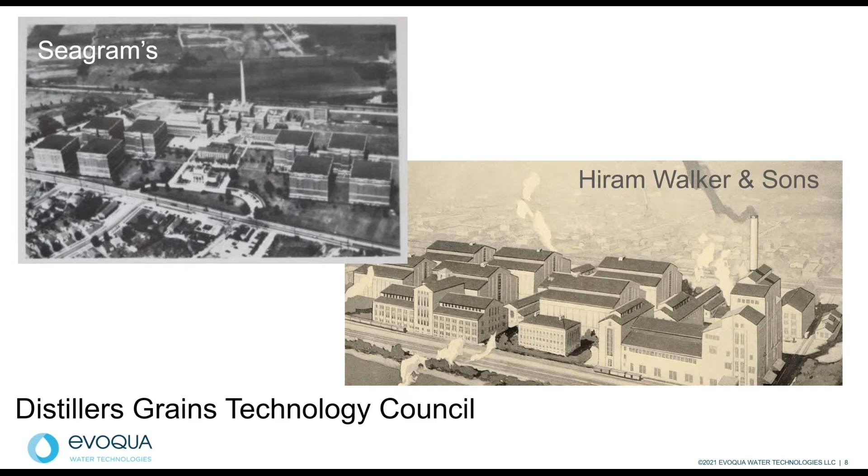Next slide. So really, the reason the council was formed was because the states of Kentucky and Tennessee had started implementing environmental regulations that restricted the disposal of stillage, or spent grains from the fermenters, into local rivers and lakes. So the idea was, what should we do? What could we do with all of these non-fermentable materials? Instead of dumping them into the rivers, animal feed products and use as animal feed ingredients really were the best option at the time.

But even further back, in the 1800s, the beverage industry was using wet spent grains and dry spent grains as animal feeds, and we were actually exporting dried spent grains to Europe for animal feed.

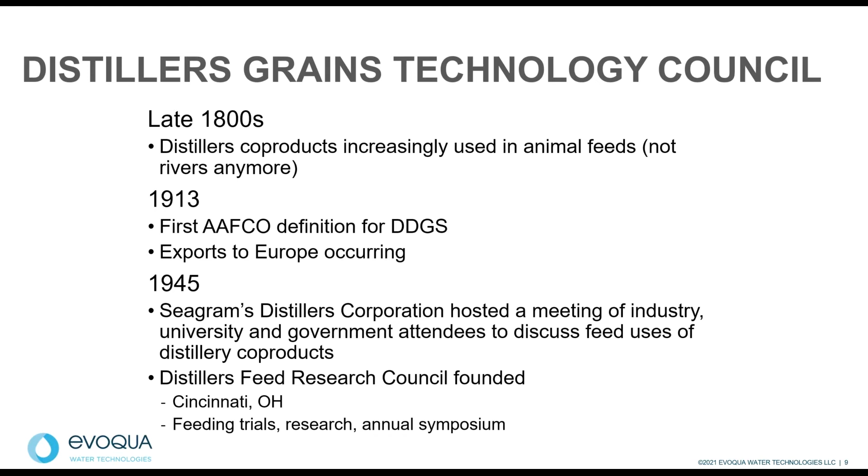Next slide, please. When we think about fermentation and industrial fermentation, whether we're making alcohol for humans, alcohol for cars, or alcohol for other industrial uses, it's not just about the alcohol we're making. We also have to consider all of the non-fermentable components. If we're talking about making any type of alcohol from a cereal grain, whether corn, wheat, barley, rye, triticale, or other cereal grains, there's going to be a lot of protein, fiber, fat, and minerals we have to deal with, in addition to water.

So we'll have to think about the flip side of the coin. It's not just about the alcohol production, and I think this is especially true whether we're talking about small distilleries or large distilleries.

If you build a small distillery that is going to be in the city center, whatever city it is, some of the things you're going to have to think about are not just the electricity and the logistics of getting the grain in and the alcohol out. What are you going to do with all the non-fermentable materials? Sometimes that is a constraining factor for facility construction.

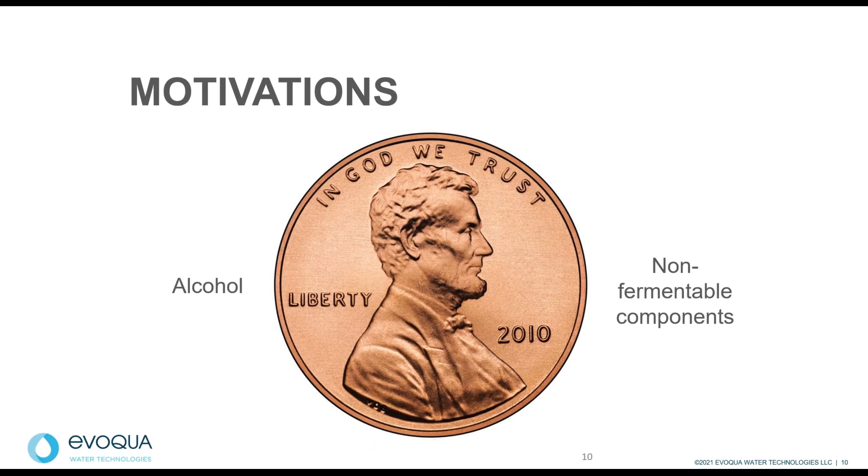If we're talking about using non-fermentables as livestock feed, which many companies have very successfully done, the biofuels industry has really done a fantastic job of this, but this may not be the best fit for you. A lot of companies see this as the easiest way to not just get rid of or deplete the stillage from your facility, but also how to reduce the cost of treatment and how to make money. So it's a balancing act between those manufacturing alcohol, the livestock producers you need to foster relationships with, and also the price and availability.

If you're giving away the stillage or the spent grains, you're really talking about lost profit. And you can further compound that by the fees or fines if you're sending the stillage down the drain for the city municipal system to treat.

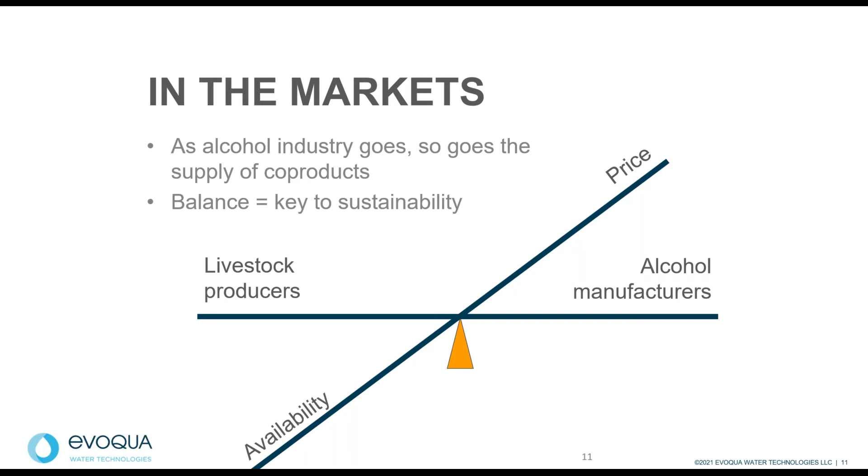When we are doing industrial fermentations and using our non-fermentable components as livestock feed materials, it's easy to think about livestock as a black box, whether it's a fish, a cow, a pig, a chicken, or a horse. What do we control? What do we do at our alcohol production facility that's potentially going to impact what happens on the farm and in that animal?

Everything we do in our fermentation or post-fermentation is going to potentially impact how that animal digests that feed ingredient. And remember, we're working with proteins and fats and fibers and minerals.

It's been shown over the last couple of decades that on average throughout the US and in other countries, if we are doing industrial fermentations and using those non-fermentable components, either as a dry distiller's grains or a wet distiller's grains, on average that DDG is going to replace between 1 and 1.2 tons. So 1 ton of DDGS will replace 1 to 1.2 tons of corn and/or corn soybean meal mixtures. Corn and soybean meal are the two biggest competitors on the national scale for distillers grains.

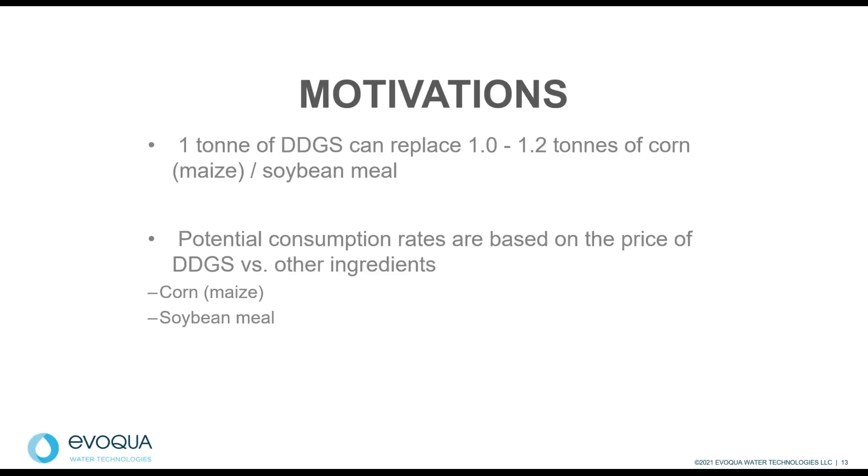So, processes and products. Whether you're making beer, spirits, or biofuels, the theoretical yield we're going to get from alcohol fermentation of cereal grain—this is true for cereal grain, but not true if you're doing a grape fermentation, sugarcane fermentation, or molasses fermentation. But if you're doing a grain-based fermentation, the maximum theoretical yield, if you had 100% efficiency, is approximately a 50-50 split between alcohol and carbon dioxide if we're looking at the glucose utilization coming out of that fermenter.

Remember, we're using cereal grain because it's starch bearing, but what we're really trying to access is the glucose. In reality, we're going to have more than just alcohol and CO2 being made. Part of that is due to yeast cell mass that is produced, and secondary products—the fusel oils, the higher and lower alcohols, not the ethanol we're targeting. Sometimes those components are important, especially for flavor, and sometimes they're not—they just essentially represent a yield loss.

On average, it's been shown that for cereal grains—whether it's corn, wheat, barley, rye, or whatever—that goes into that fermenter, you're going to get about a third of a pound of alcohol, a third of a pound of CO2, and about a third of a pound of non-fermentables, whether in dry or wet form. That rule of thirds is what we typically see.

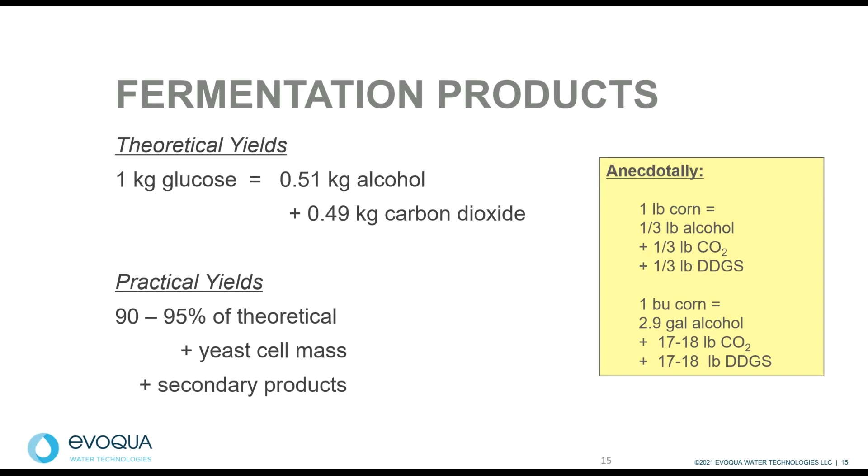When we look at spirits manufacturing, whether you're looking at whiskey, vodka, or other types of spirits, many of the factories are going to be similar in many respects to an ethanol plant, what we typically think of in terms of corn-based ethanol. Not just in the US, but in other countries as well.

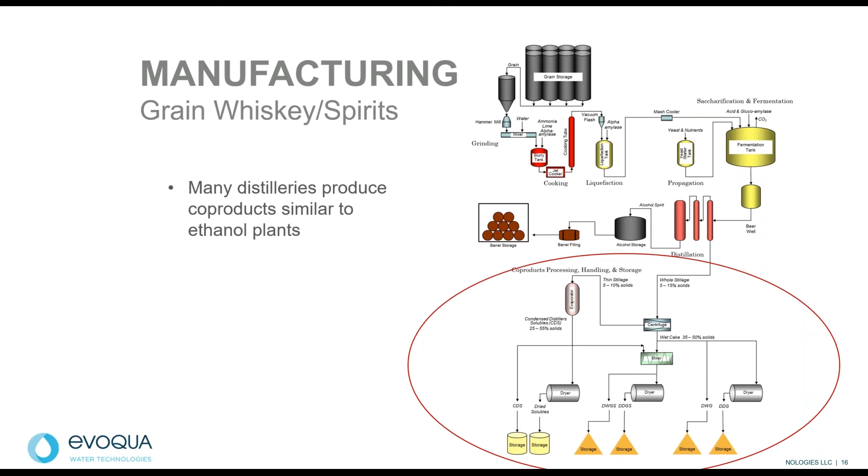Some companies, especially the larger distilleries, will have an evaporator step where they concentrate the thin stillage that comes from the centrifuge to produce a syrup, and then they can add that back to the wet cake to produce distiller's dried grains with solubles, or maybe distillers wet grains with solubles. But there are other things we can do. We see, especially in the larger factories, wet and dry products with or without solubles. They might have wet solubles sold separately or dried solubles sold separately. It really depends on scale. Next slide, please.

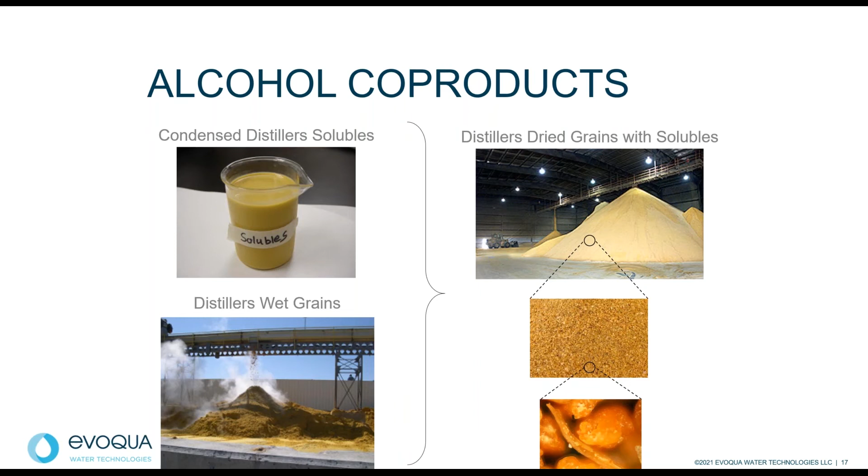If you haven't seen distillers dried grains or distillers wet grains, these are typically what you're going to see, and you also see condensed solubles in the upper left hand of the slide. The color of each of these products will resemble to a large degree the cereal grain coming into your facility. In this case we see a golden yellow, this is a corn-based fermentation. If we have a rye or wheat-based fermentation, we're typically going to see darker solubles, darker wet cake, and darker DDG. So color is largely impacted by the type of cereal grain used in your facility. Next slide.

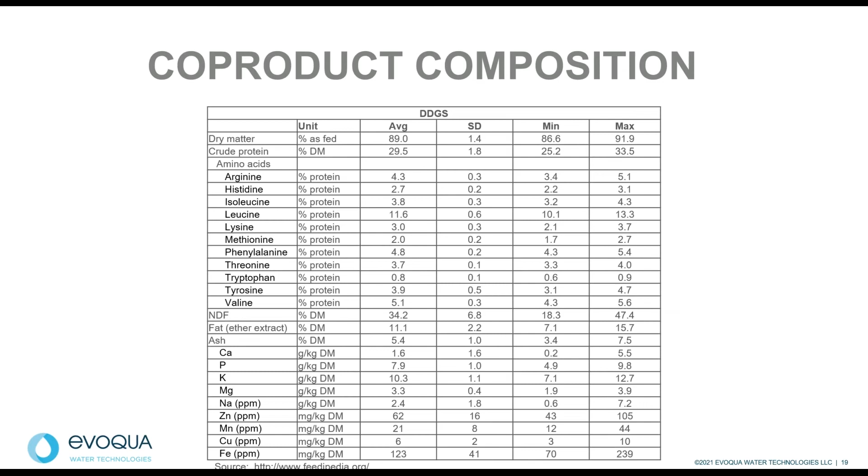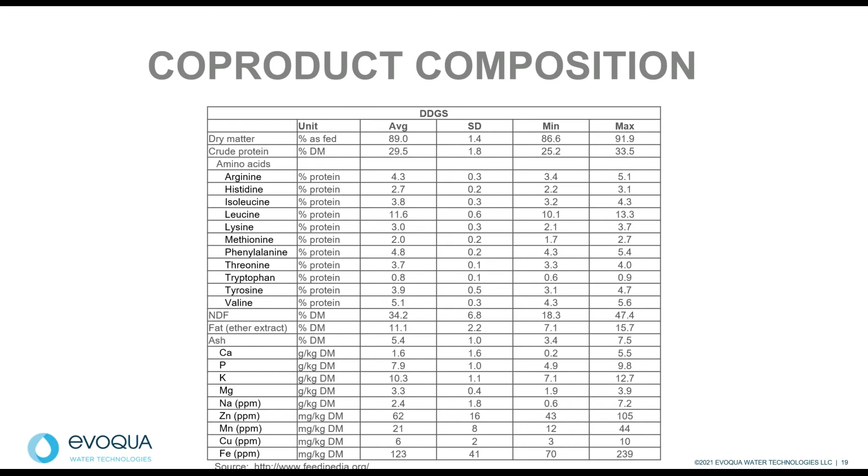If you dry your non-fermentables down into a DDG or DDGS, in this case distillers dried grains with solubles added, protein is going to range from about 25 to about 34-35% for most distillery operations. The ethanol plants are actually producing significantly higher protein, but they've implemented, or are starting to implement, some protein extraction technologies that we typically don't see in beverage distilleries at this point in time. The fat content for distillers grains generally ranges from 7 to about 16%, depending again on the type of cereal grain used for your fermentation. The ethanol plants are by and large removing oil and selling that oil to the biodiesel industry. We see some of the large distilleries starting to do that as well. Next slide, please.

We talk about malt whiskey fermentation, a little bit different process. This really does not resemble an ethanol plant anymore. We see a couple of different types of co-product materials: a centrate, draff solids, and potentially pot ale syrup that is added to the draff to produce distillers dark grains or distillers wet grains. We also see spent lees that might be produced from the secondary still. So the byproducts from this type of manufacturing are going to be a little bit different. We'll go to the next slide.

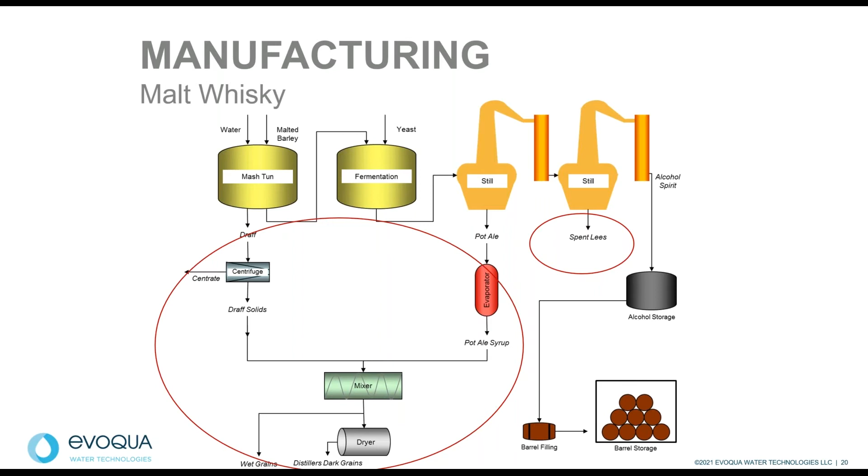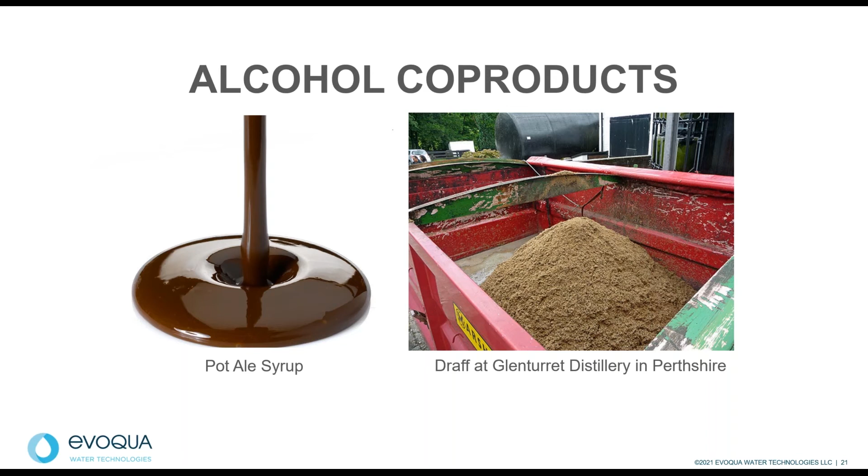Just to show you, here's an example of what pot ale syrup looks like. That's the syrup that is in some respects similar to condensed distiller solubles from a whiskey or vodka plant. And then draff is very similar again to distillers wet grains that you would see at a whiskey or vodka plant. Next slide.

In terms of nutrient content, protein and lipids are two of the critical nutrients we look at for livestock feed applications, but nutritionists really want to understand the full suite of nutrients, including amino acids and fatty acids. If we look at crude protein, pot ale syrup is about 37% crude protein, so it's a little higher in protein than we'd typically see from a whiskey or vodka distillery producing condensed solubles. Draff is about 20% protein, on a dry basis, and distillers dark grains without solubles is about 28%, which is quite similar to distiller's dried grains from a whiskey or vodka plant.

If we look at fat, pot ale syrup is really low in fat content, almost 0%, or if any fat has been extracted, it's quite low. Draff is about 8%, and distillers dark grains are about 8%.

So why are these nutrient values some similar and some different? I think we have to consider that we're talking about a grain-out versus a grain-in style of fermentation. In the grain-out fermentation, we're basically trying to extract the soluble sugars and solubilize them so we can pull those into fermentation. So what we have left in the feed products are much more of the nutrients than we would typically see compared to a grain-in fermentation.

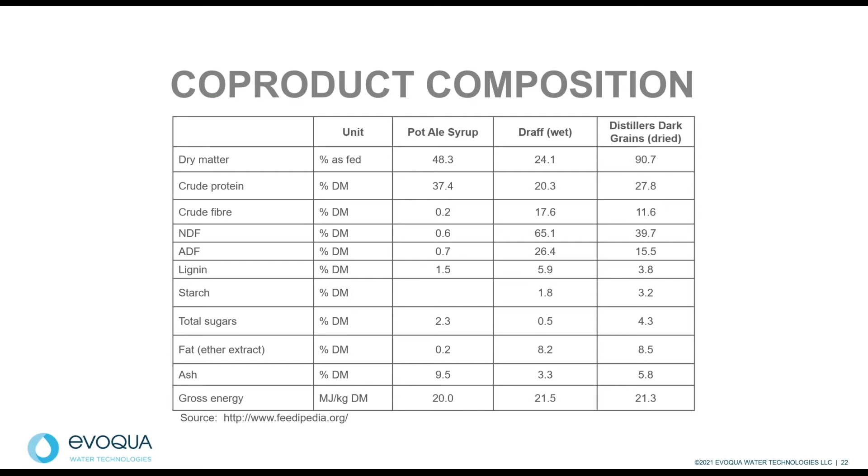Right, next slide, please.

Beer manufacturing also has non-fermentable materials. Again, when we talk about styles of fermentation, much of beer manufacturing uses a grain-out style of fermentation, where we use hot liquor and the mash tun to try to extract the solubilized or solubilizable sugars. In this case, the spent grain or brewer's grain is, in many respects, going to be quite similar to what we'd see from a malt whiskey manufacturing point of view.

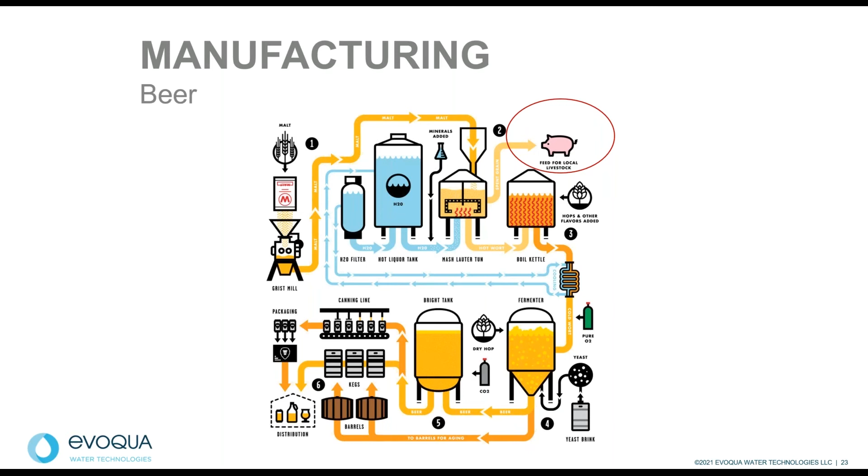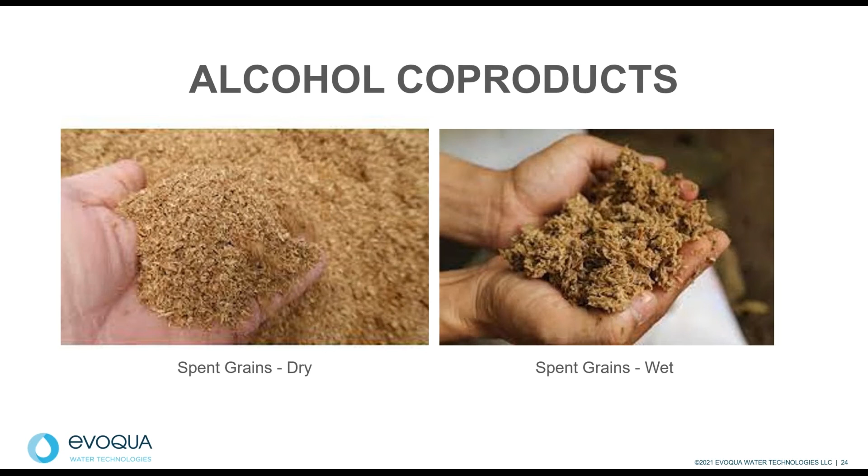We'll go to the next slide and take a look, and you'll see the spent grains, either dry or wet, are in many respects similar to what we'd see as draff from a grain-out style fermentation, a malt whiskey fermentation. Next slide.

Nutrient content wise, protein content for brewer's grains is about 26%, and lipid or the ether extract is about 7%. So just like the draff or the distiller's dark grains we saw from a malt whiskey fermentation system, the biggest difference is really going to be in the mash bill used for that fermentation, and depending on what state or country you're in, what grains you can use.

We do see the dynamics of the beverage industry, whether it's whiskey, vodka, or beer, with lots of novel products hitting the marketplace over the last couple of years. We're not just talking about malted barley anymore; we're also talking about a variety of different kinds of cereal grains being used for these industrial fermentations. So we see the nutrient contents varying when we look at these co-product feed materials.

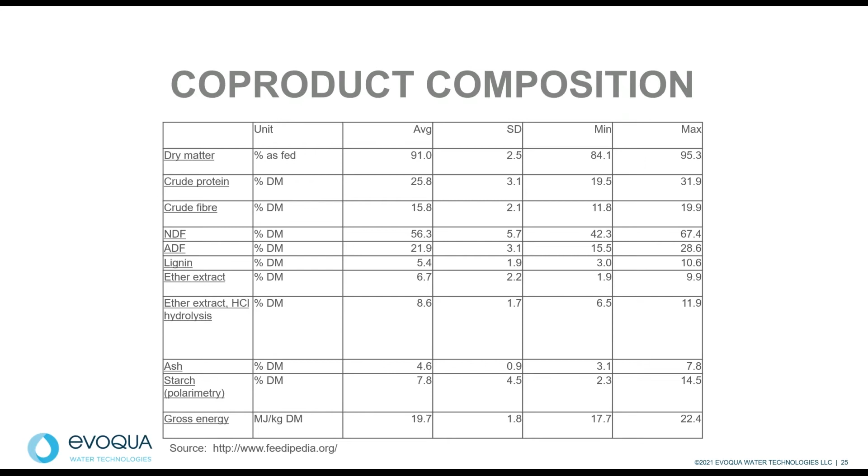Now, I do want to mention, if you're going to be using your co-product feeds or byproduct feed materials in the livestock industry, we as an organization, the DGTC, have developed over the last couple of years some guidance tools that you might be interested in using, talking about the different kinds of feed materials we see coming from these industrial styles of fermentation.

Specifically, we're looking at distilleries and biorefineries. What we used to call ethanol plants, we're starting to call biorefineries, because we see these companies starting to extract proteins and lipids and do some fiber fermentation. So we really see biorefineries evolving in terms of the feed products they're manufacturing, and they're targeting specific species, especially with high protein or high fiber style feeds.

But if you're not moving in that direction and you're building a distillery or a brewery, and you're going to be selling these into the livestock feed marketplace, what are we making? So we've got some guidance documents that will hopefully be helpful for you. Next slide, please.

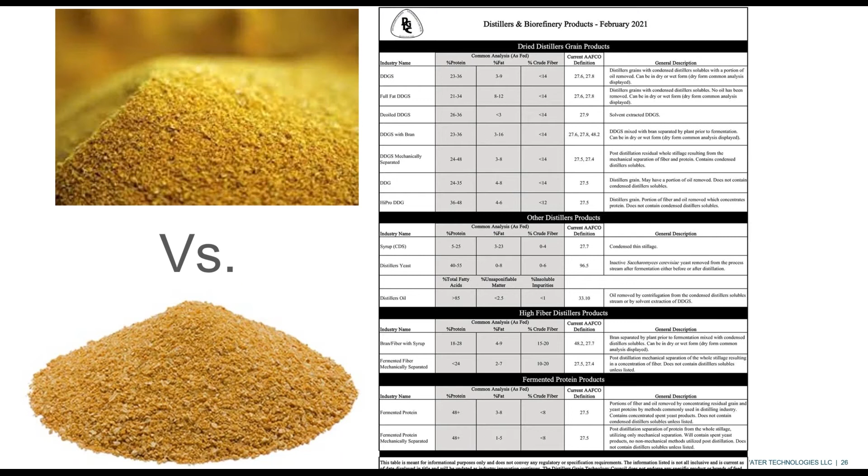So let's talk about some economics. What I mentioned, corn and soybean meal being the biggest competitors for our feed materials that we're going to be producing, whether it's brewers grains or distillers grains or draff, whether it's beverage or biofuel. We're competing with corn and soybean meal in the marketplace. And so it's important to understand the marketplace evolves quickly, and sometimes this is due to situations like COVID. Sometimes it's due to tariffs and trade wars with other countries like China, for example. Sometimes the feed values are dictated by supply and demand in the US itself.

So if you're going to be selling your feed material into the livestock industry, it's important to understand what is the value of this material, what's it worth to me as a company. And if you're giving it away, you're really not capturing that value. Next slide, please.

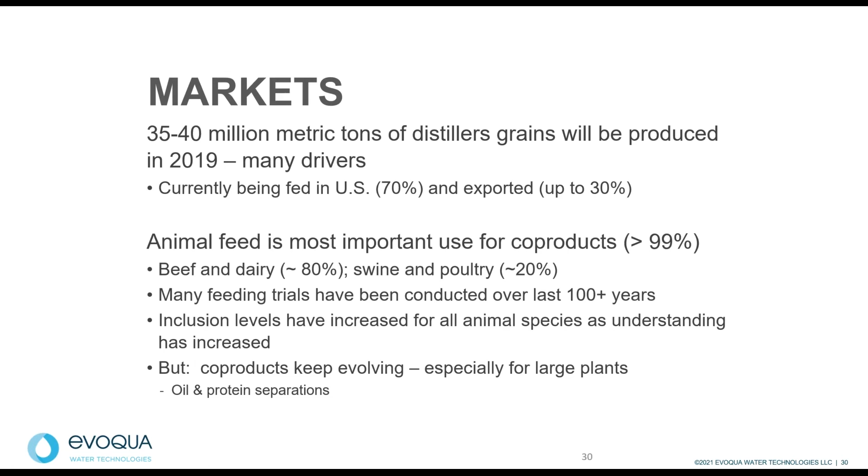So most of the domestic use of distillers grains and brewers grains goes to beef and dairy, but there is a growing percentage that's also going into the swine and the poultry industry. And I think these are going to shift a little bit as we move forward over the next 10 years, as we see the ethanol plants start to evolve in terms of their protein products and their fiber products and their fat products. Next slide, please.

So if you want to deal with your stillage coming out of your fermenters, how are you going to do that? Are you going to send it down the drain, or are you going to try to capture the value that's there and not lose that opportunity cost? So some distilleries just provide their slop to local farmers and either they give it away or they sell it for 50 cents a ton or 10 cents a ton. It's expensive to ship water, whether you're shipping it or the farmer is shipping it.

And it's expensive to send your stillage down the drain and have the local municipality do the water treatment. So maybe an option that some companies are thinking about is separating solids from liquids, and that's going to reduce the cost for transport as well as potential water treatment. Next slide.

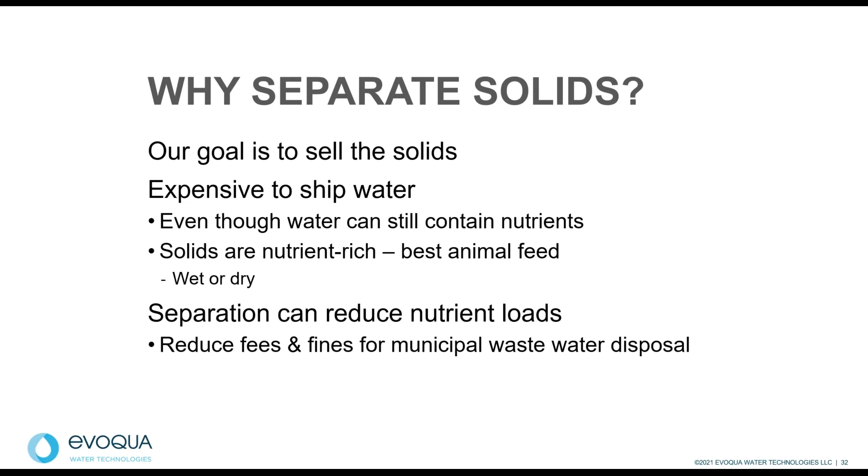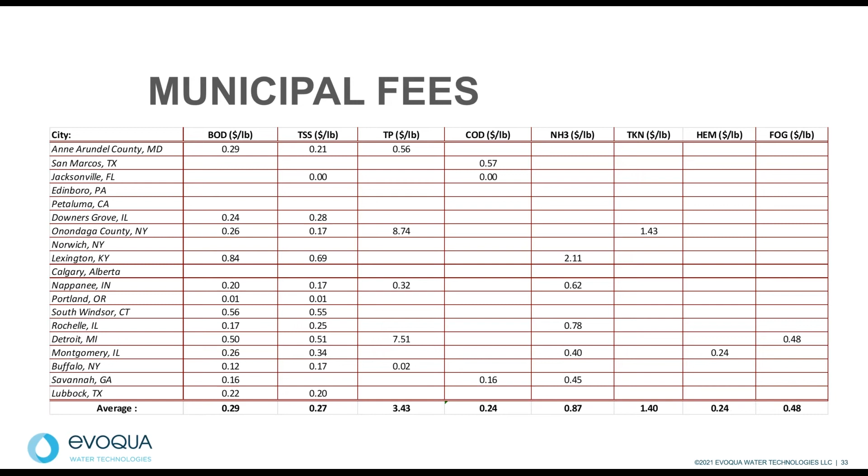So every city is going to be different. Every municipality is going to be different in terms of how to calculate what those fees or surcharges are going to be. You'll see that most cities use BOD as part of their calculation, but most cities don't use COD. Some do, but most don't. And it really depends where you're located to really understand what is that cost going to be to me as an organization, as a company, if I send this down the drain and have the city deal with this. Next slide, please.

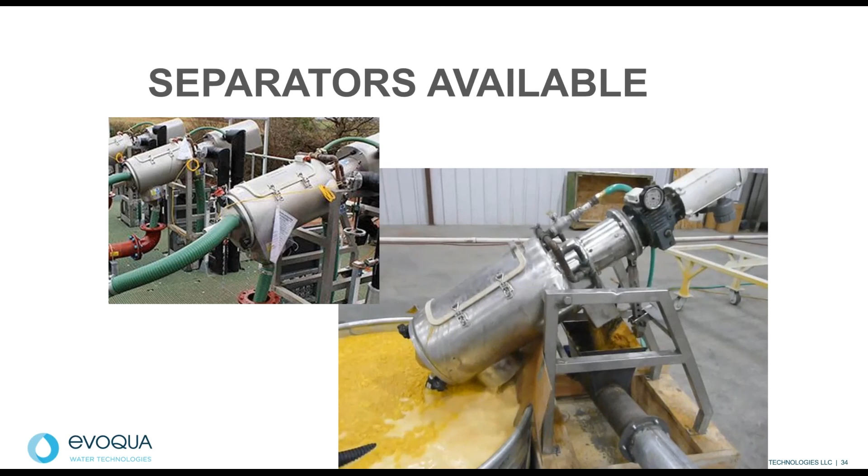So there are lots of different separators that are available. Some are quite expensive and some are low cost. This is an example of a small centrifugal style of separator that separates liquids from solids. Next slide.

How much do you need in order to break even? That's what I get asked quite a lot. If we're going to try to produce a product that we're going to ship to local farmers that's about 50% water, 50% solids, which is typical for a distiller's wet grain.

If you talk about a really small scale centrifugal separator, it's about $35,000. If you're thinking about a large scale separator, that's going to be more like $100,000. So really, how many tons do you have to produce in order to break even? Sales price for distillers wet grain generally bounces around between $50 and $100 per metric ton. So somewhere between 350 and 700 tons you're going to have to produce. So depending on the scale of your factory, you can determine how long it will take to produce that.

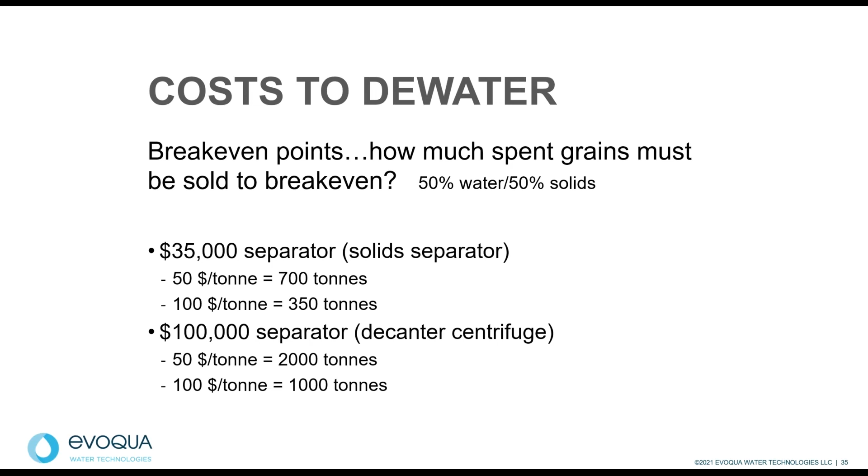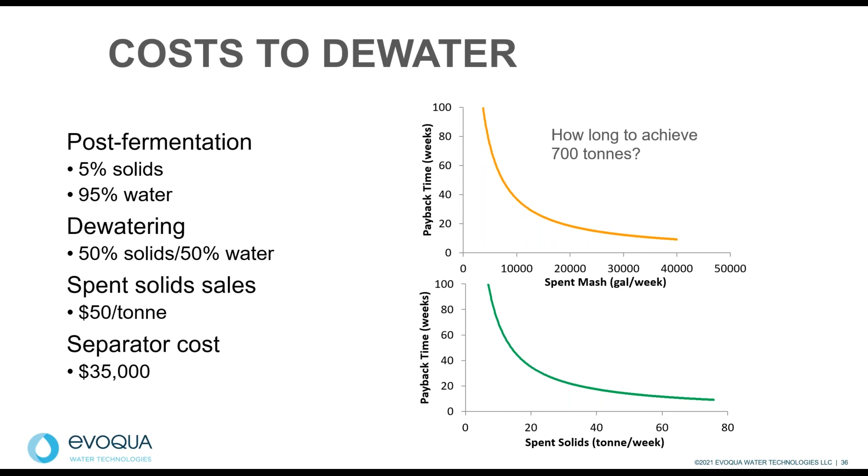So these seem to be really a good avenue if you're trying to sell a distillers wet grain product into the market. You're still going to have to deal with the centrate or the thin stillage, which is primarily water and then the dissolved solids. And most companies that install these separators will sell their separated solids as distillers wet grains for livestock feed, and then they'll send the centrate down the drain to the city. And what we have seen is more than a 50% cost reduction for disposing of the stillage by using that approach. Next slide, please.

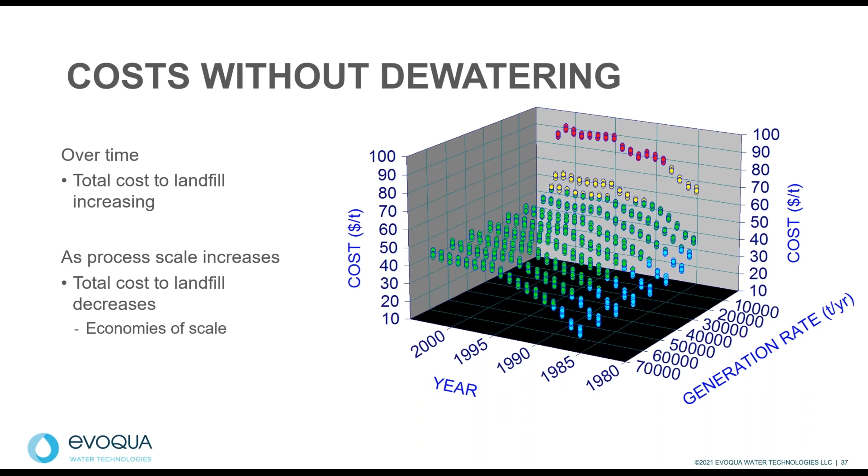Some companies do landfilling of their stillage, which again, it's expensive to ship water, but also tipping fees nationally are on the increase. So if we take a look at some of the trends, the bigger you are, the less expensive it's going to be. And as we proceed in time, the more expensive it's going to be to landfill that stillage. So it seems to make sense to try to add value and not just landfill and not just send it down the drain to the city. Next slide, please. Well, next slide as well.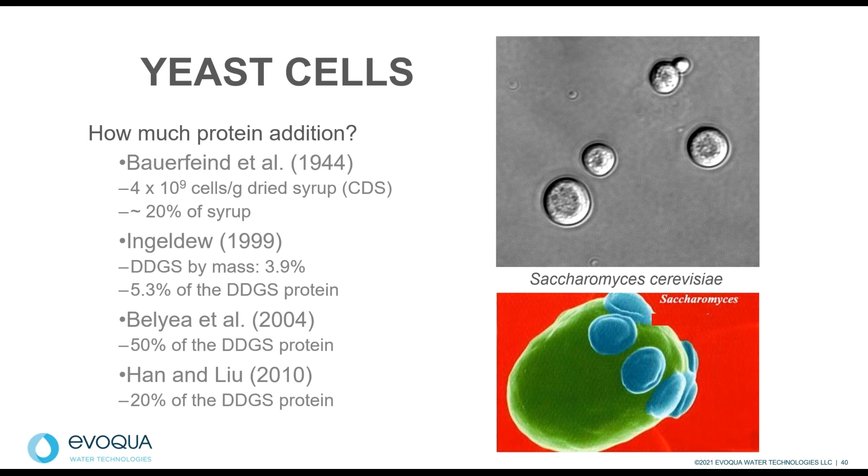A couple of other issues I wanted to talk about. Beverage and biofuel fermentation use Saccharomyces cerevisiae, the standard brewer's yeast, and just in the last couple of years, we have seen livestock nutritionists really start to understand there is value in the yeast as part of the livestock feed ingredient components. So if we're sending this down the drain, we're really losing this value. Yeast acts as a prebiotic and a probiotic, and we're just now starting to understand that there's a lot of value in taking this yeast and sending it to livestock as a feed ingredient. Next slide, please.

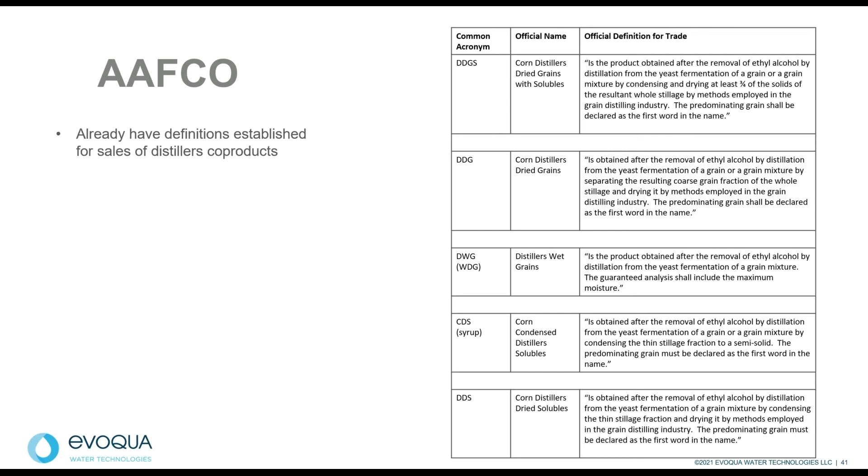If you do that, again, earlier in the presentation, I mentioned definitions. So the DGTC has developed a set of types of co-product feeds, and that is all revolving around AAFCO, or the Association of American Feed Control Officials. You cannot legally sell a feed ingredient in the US without a legal definition as published in the AAFCO official publication. And luckily for almost all of the breweries and distilleries in the market right now, there are definitions that your product can fit under. So this makes your life easier. Next slide, please.

If you do sell your stillage or spent grains as an animal feed ingredient, it's great that we've got AAFCO definitions ready for you all to use, but you will have to comply with the FDA's Food Safety Modernization Act. So you are producing a livestock food, and you'll have to follow the federal regulations in terms of facility sanitation and cleanliness, and then hazard control, so that we're not poisoning animals or potentially causing problems with those animals. Next slide, please.

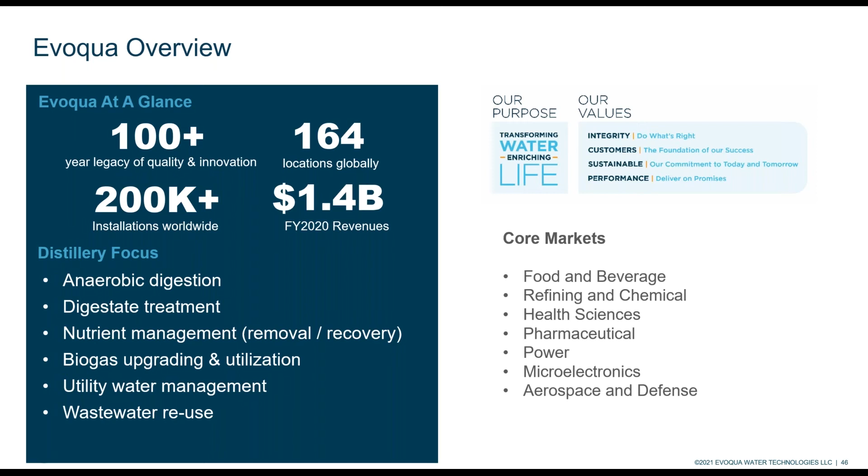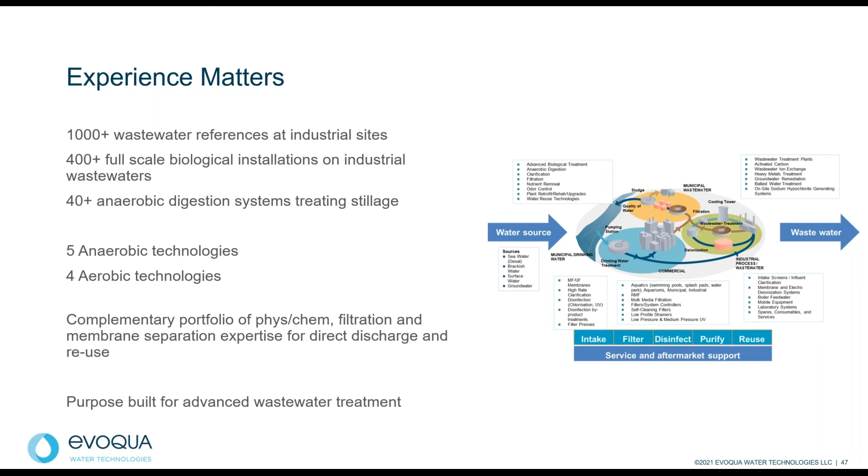We're highly experienced in the business, been doing anaerobic digestion systems as Evoqua for over 100 years. We have 1,000 wastewater reference installs, 400 on industrial wastewaters, 40 anaerobic digestion reference installs on stillage, 5 anaerobic processes and 4 aerobic processes to pull from, and the full complement of physical, chemical, filtration, and membrane separation technologies that you need to facilitate either direct discharge or wastewater reuse.

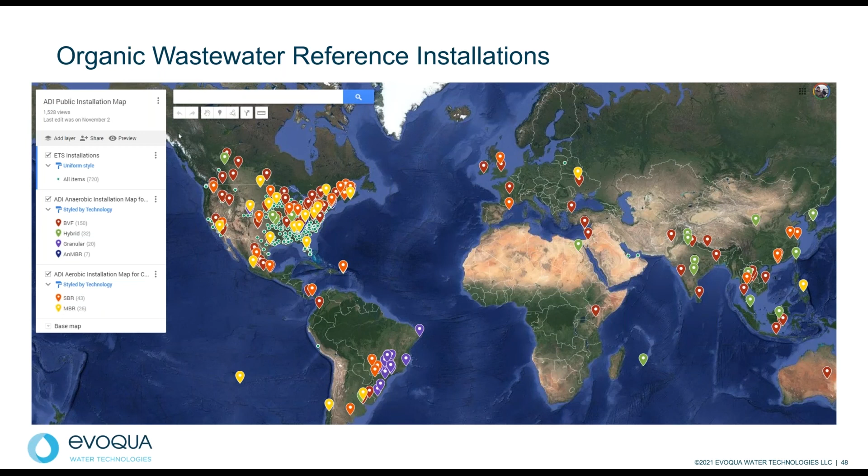Here's a quick look at the global reference installation map. You will see that red, green, purple, and blue are anaerobic installations. Orange and yellow are aerobic polishing installations. And the little green dots are dissolved air flotation. Here's another look at the distillery specific reference installations and process used.

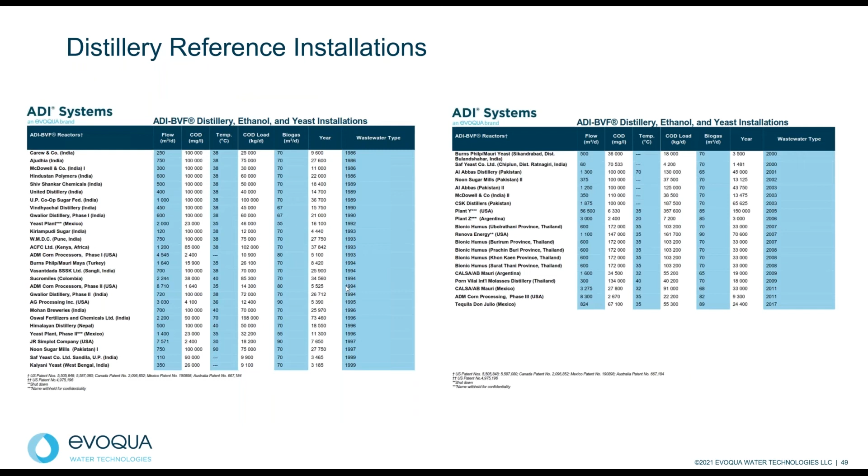I would be remiss if I didn't mention commitment to sustainability. Evoqua is aligned with the United Nations Sustainable Development Goals. We, of course, primarily contribute to clean water and sanitation, although we also play a role in affordable and clean energy, responsible consumption and production. We measure and manage our sustainability commitments through both our handprint, which is how we help you guys, our customers, accomplish your own goals, and our footprint, which is how sustainable we are in our own operations.

Evoqua is a service organization. As you contemplate the many permutations and combinations of dry distillers grains and/or anaerobic digestion, it is often helpful to know that service and support is available. Evoqua is the largest service network in North America. We service, support, operate, and maintain everything that we sell and many things we don't.

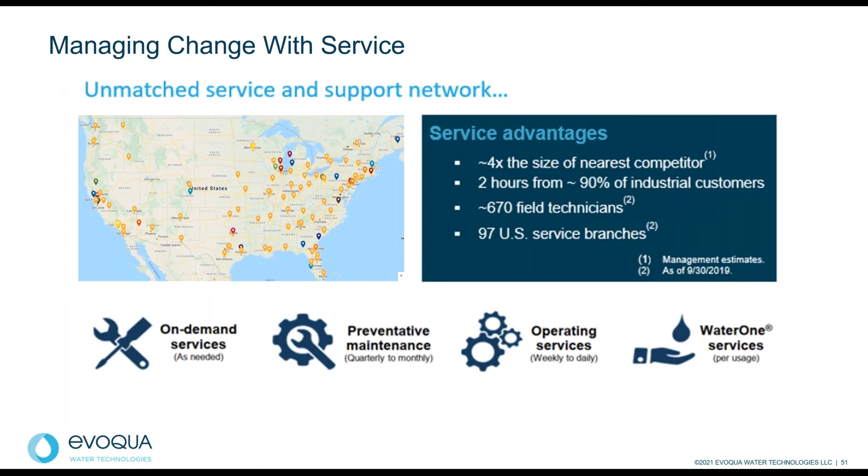As with any high-strength organic feedstock or waste material, however you want to view it, it's often helpful to have analytic and lab and piloting and bench scale capabilities available to you. We do, of course, have those. Stillage is a complex material, and it is often helpful to start at the lab to validate assumptions, methane potential, toxicity testing, and so on as you develop your project.

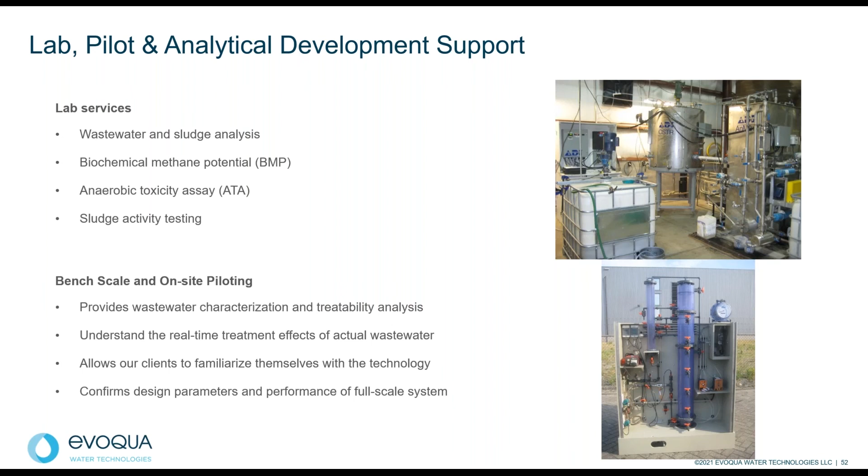I'd also like to mention that we've recently launched a Sustainability and Innovation Hub in Pittsburgh just earlier this year. This facility will be used for stillage digestion research and development, among other things. This is a state-of-the-art facility intended to be not only a technical hub, but a commercial hub where we can co-develop projects with interested parties.

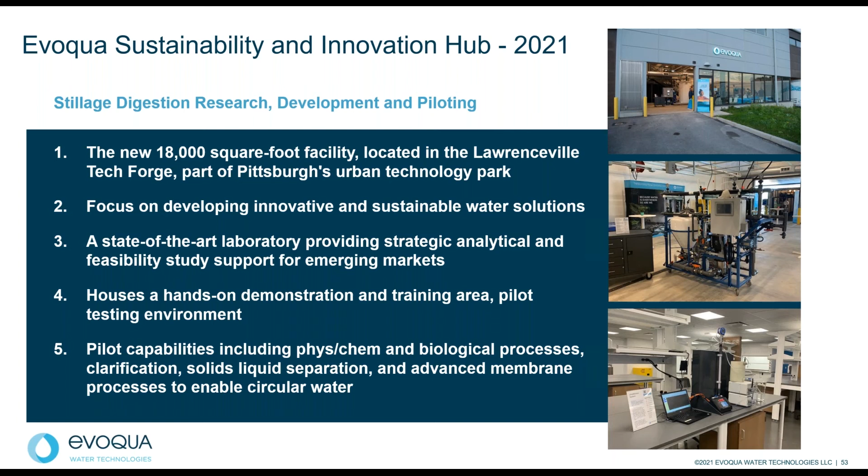The economics of DDG, as Kurt mentioned, aren't simple. There's a lot of factors involved there as well. And there's perhaps a thought that it is more suitable for the larger processors to absorb that type of infrastructure and investment to play in that market.

When we look at the economy overall, especially the fuel economy, we're of course seeing strong support and incentives around renewable fuels. So that is increasing the value of biogas and decreasing the cost of converting stillage to biogas. That, of course, aligns well with corporate sustainability goals as we all endeavor to reduce our greenhouse gas emissions and carbon footprint.

And if you think of DDG and the energy inputs required, it's inherently an energy intensive process, which can also further enhance the attractiveness of a low operating cost alternative or a net energy positive alternative of anaerobic digestion. Of course, as Kurt mentioned, brewers grains are similar to DDG, and the distillery industry can simply look at the brewery industry as an adjacent market that successfully adopted anaerobic digestion as a primary treatment process.

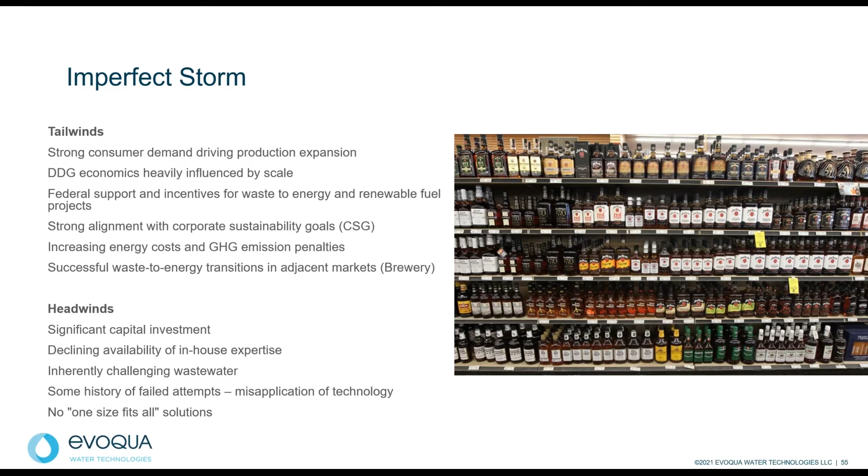Thank you, Barry. Again, to put it into context, this is just an introduction. We're discussing topics around the idea that with this co-product from alcohol production, instead of getting value out of it by drying it and selling it as animal feed, an option that might be put in front of you from Evoqua would be to take that same material and digest it anaerobically instead, turning that food value still present in the stillage into a form of green energy rather than drying it up and selling it as animal feed.

So we'll talk very quickly about some of the issues around anaerobic digestion. As you take the energy out in the form of biogas, there might still be other things you need to deal with, such as nutrient removal, nitrogen and phosphorus. What do you do with the biogas you're generating? How do you get the most value out of it? There are also some waste products out of anaerobic digestion that we will discuss, and what we do with those waste sludges, and can we really get value out of it in the form of fertilizer as well.

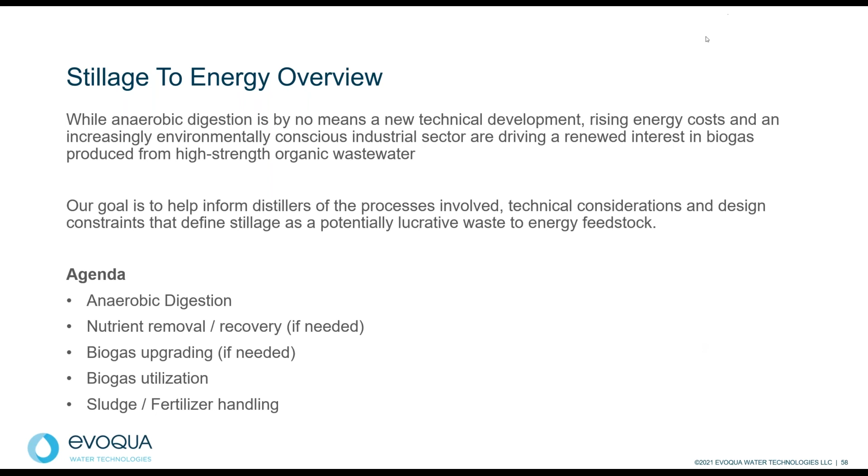Next, Barry, thank you. So stillage, as Kurt was describing, you have, after you've taken the glucose and sugary material in that feedstock and converted it into alcohol, there's yeast that does that in the absence of oxygen. Yeast takes the glucose into alcohol.

Yeast takes the glucose into alcohol. There is still all that other organic material that is food, but it does not go through that biochemical pathway toward alcohol. There's still protein and fat, oil, and grease that remain in the stillage—very strong material. You're making that soup, that broth, in order to ferment the sugars. What's left over after distillation has a lot of organic content, a lot of nitrogen, a lot of phosphorus. Depending on your feedstock—corn, rye, or sugarcane molasses—that will also affect the amount of non-degradable or slowly degradable material, the amount of ash still present in that waste material.

We will take that into consideration as we look at the overall picture of your stillage and look at the right way to get value out of it, other than just disposing of it in a landfill, like Kurt was saying.

So here, what we're doing is, in a way, the same concept. Instead of feeding cattle or livestock, we're feeding anaerobic microorganisms that will turn the protein left over in the stillage into energy.

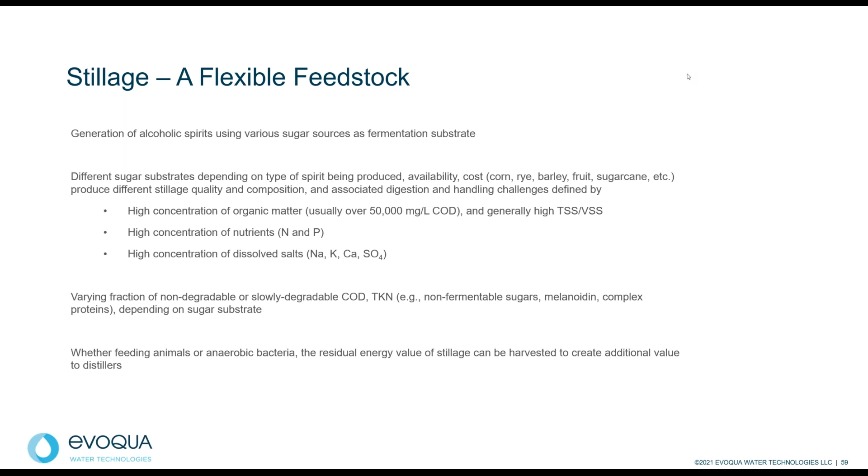Okay, so just very basic fundamentals on anaerobic treatment. You can think of an anaerobic reactor in a way similar to making alcohol, where instead of yeast turning glucose into ethanol, we have a whole consortium of anaerobic bacteria, anaerobic microorganisms, that again in the absence of oxygen will transform the organics into biogas—into methane mostly, and also some CO2.

There will be some remaining organic material—organics not fully degradable anaerobically might still be left over in the digested liquid. Also, some of the energy in the stillage is converted into new biomass. So out of 100 pounds of COD that come in, you will have about 5 pounds of digested new bacteria that you will remove from the system as sludge.

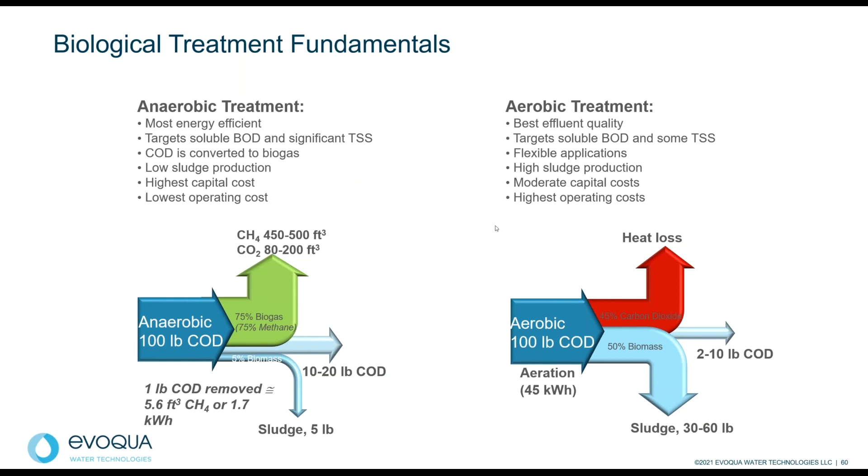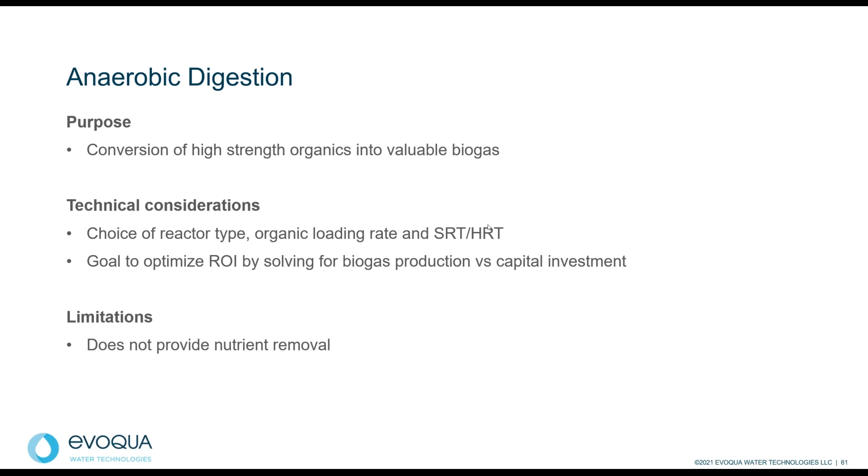Okay, so again, the idea is to apply the right technology to every particular situation. We'll look at the technical side, we'll look at the economics, and the solution will be the right combination of technical and economic factors.

What you do after anaerobic digestion will affect whether you need to do some post-treatment on that digested effluent. As we said earlier, one advantage of talking to Evoqua is the fact that we have at our disposal a whole series of anaerobic digesters. So it will be a case of us using the most appropriate technology for the particular needs of each plant, and we'll look at the local conditions, treatment objectives, economics, of course.

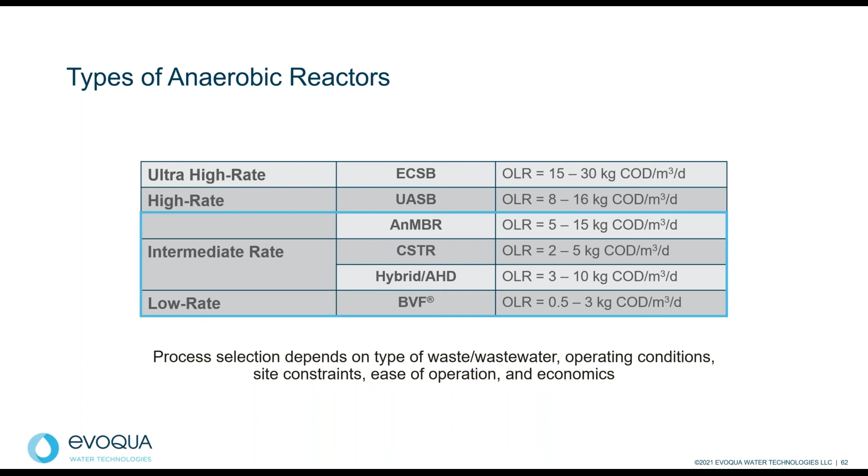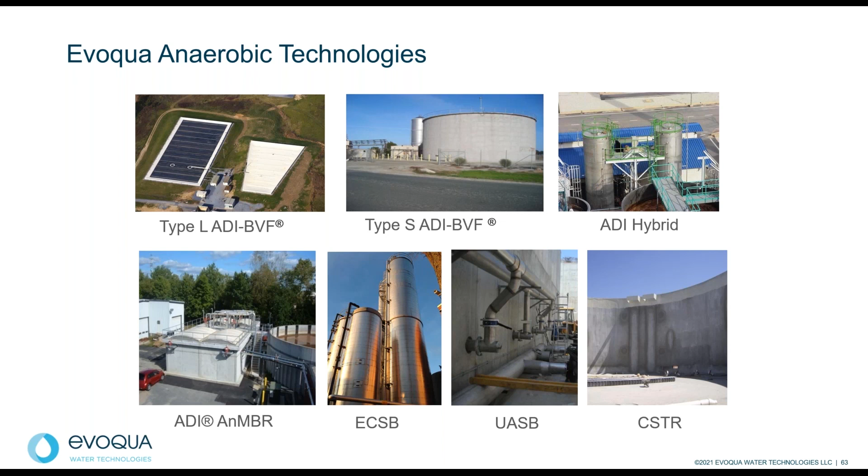This is just to give you an idea of what those reactors may look like. I will concentrate on the reactor on the top left, so that's the low rate ADI-BVF reactor. The reactor on the bottom left would be the anaerobic MBR system. And what we are using also for stillage digestion will be a form of a CSTR, so on the bottom right. I'll go quickly through those as examples of what you can do with stillage.

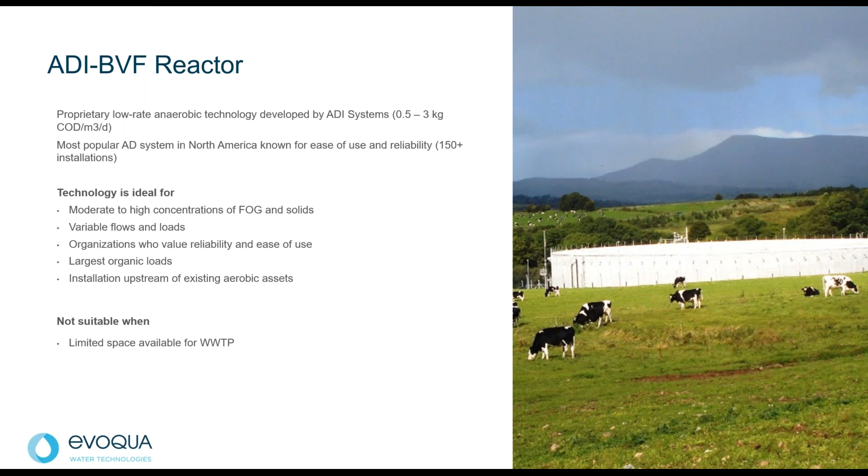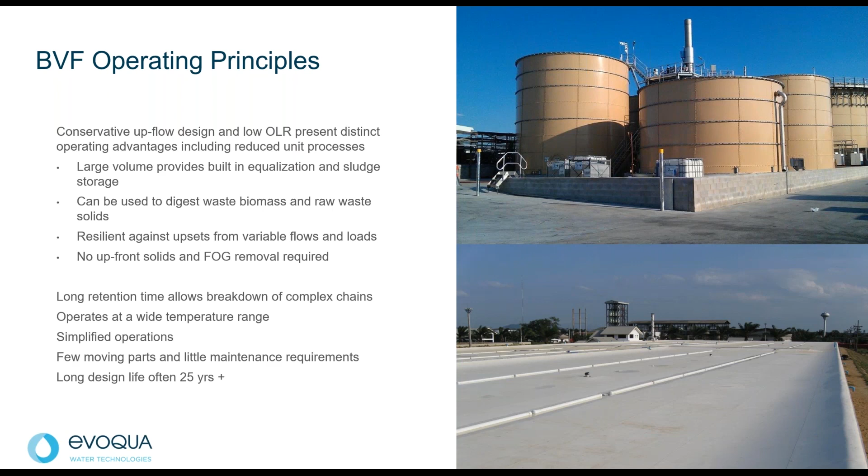The BVF reactor has been used at over 40 distillery plants around the world. A lot of them are sugarcane molasses-based distilleries, but also this system has been used at distilleries in North America for the treatment of ethanol or alcohol being made from corn or similar cereal grains. The BVF reactor is characterized by the long retention time, so it's a large reactor for the amount of load that you're treating. But again, that large volume gives you the stability required, the time required for digesting not just the complex proteins that are in the stillage, but also the organic, volatile, digestible solids that are still in there as well. So this type of reactor is very good because it can digest the stillage straight up without any pre-treatment, without any removal of the solids or the fat, oil, and grease.

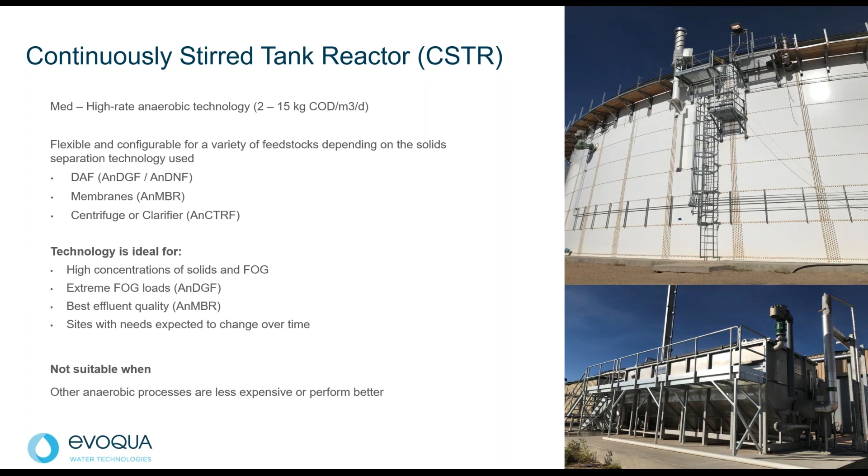The same applies to a CSTR type of approach, as I was saying, that would be the medium rate reactor. The main difference between the CSTR and the BVF reactor is the fact that after you come out of the anaerobic digester, you will need a unit operation to separate the solids from the treated stillage. So in this case, we will look at each specific situation to decide on the type of separation, whether it's flotation, whether it's membranes as a physical barrier to remove those solids, or perhaps a centrifuge or some other form of physical separation of the biomass, keep the biomass in the anaerobic environment, and then discharge a liquid stream with a very low concentration of suspended solids. Again, this is still ideal for treating stillage straight up without any pre-treatment.

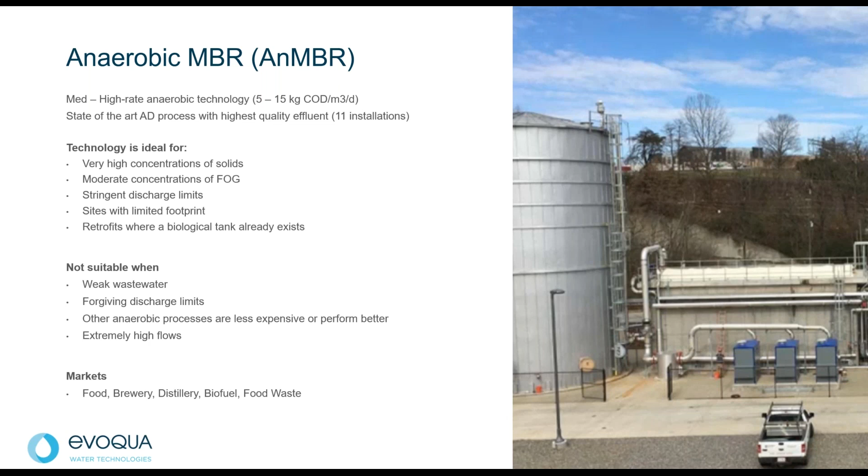Finally, a more recent development in anaerobic digester technology is the coupling of the CSTR, the continuously stirred tank reactor that you see on the left, and a membrane separation unit process, that's what you see on the right, where we were taking ultrafiltration and microfiltration membranes to keep the biomass inside of the system, and then discharging just a clear effluent with no suspended solids. Again, very well suited to very high COD, very high suspended solids concentrations that you'll see in stillage.

As I said before, the anaerobic digester will take the proteins and organics and convert those into methane. It will not do much to nitrogen and phosphorus. So the high concentrations of nitrogen and phosphorus that you'll see in stillage, you will still need to deal with, or pay your downstream POTW, your sewer, your municipal treatment plant, to treat it for you.

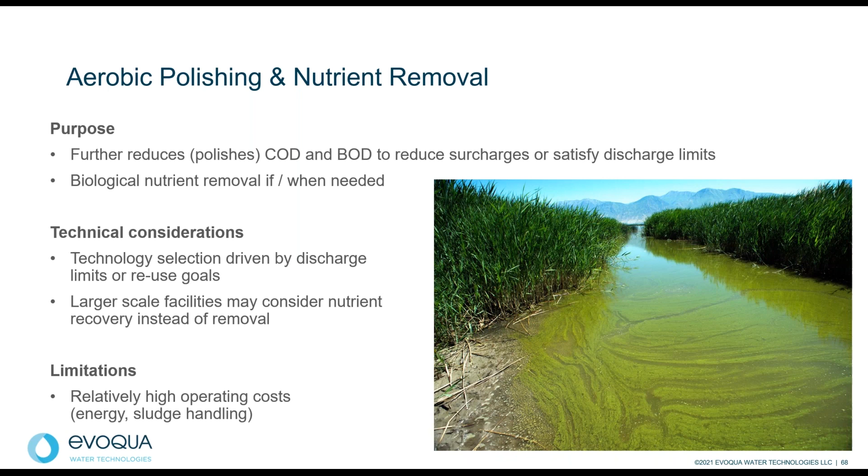So here are a couple of options that we might apply for post-treatment. This is treatment after anaerobic digestion, after taking the biogas out. You will still need to do some aerobic treatment in order to bring your water to compliance prior to discharge.

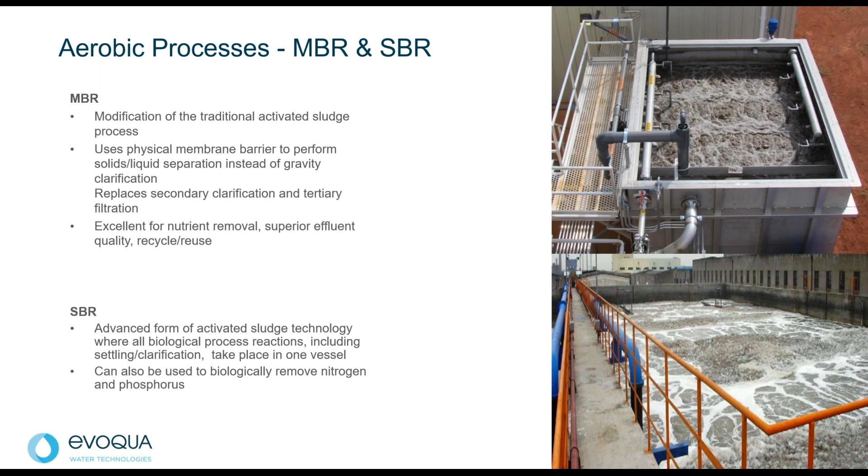The aerobic system is able to reduce COD, but also nitrogen and phosphorus, depending on what those limits are that you're trying to meet.

So as we get into analyzing stillage, again, we talked about how we're making biogas out of it. There's green energy in there. How you use the biogas is also something that we can help your company decide. What's the best way to use the biogas?

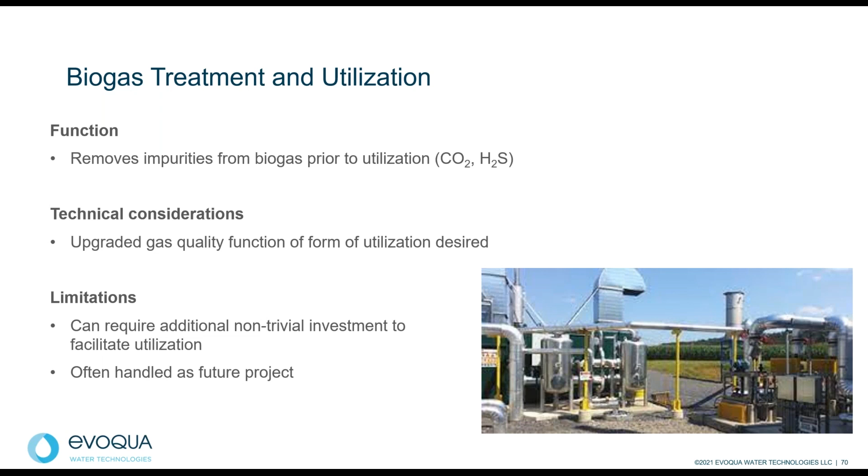Is it best or easiest to burn it in a process boiler? In that case, you don't need to clean it so much. If you're going into a more advanced way of utilizing the biogas, like electricity generation or putting that gas back into a natural gas pipeline, then you will have more sophisticated and more complex treatment processes to clean the biogas. Again, we will work with you in looking for those better ways, or the most appropriate way, of handling that biogas.

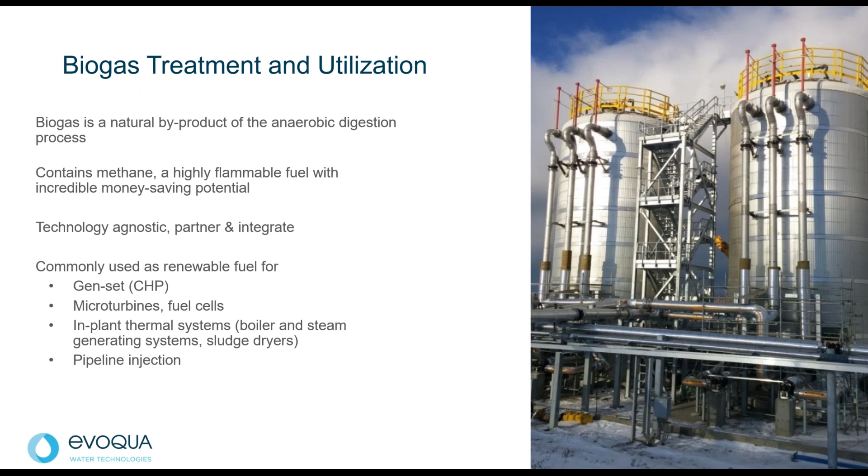So what do we call success? Success for us would be our ability to match the needs of your particular situation, your local variables, your local objectives, and having that set of solutions that best match that set of variables in achieving your sustainability goals, whether it's converting that waste to energy, becoming energy and water self-sufficient, being able to reuse water. Again, those are all laudable sustainability goals, but economics comes into it as well.

So there are cases where doing that anaerobic digestion, converting the stillage into biogas, will make the most sense overall for your particular situation. Again, we're talking about going down quite different approaches to handling the stillage. You can use energy and evaporate it and use it as DDGS and animal feed, or we can look at actually taking the energy out of it in the form of biogas by using an anaerobic reactor for it.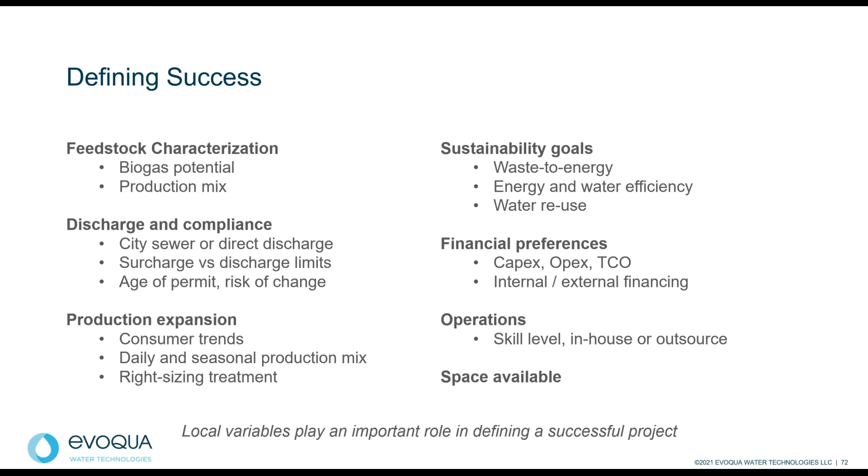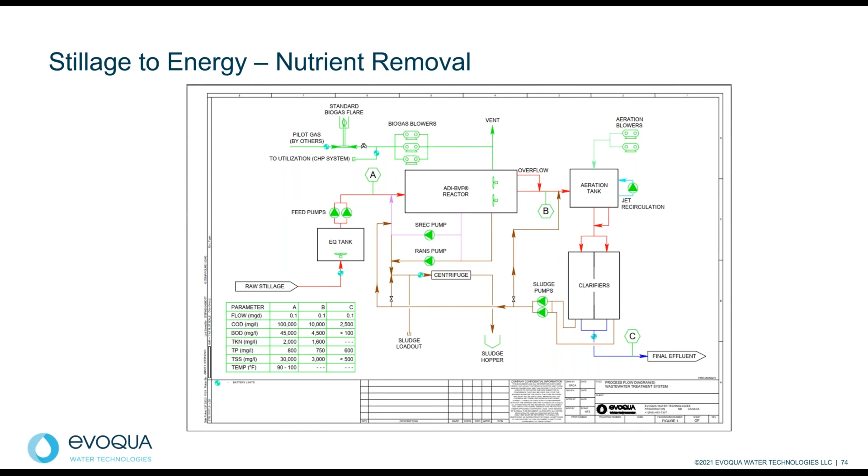So this is a typical train for when you have relatively medium-sized nutrient loads that you have to treat rather than recover. The next approach was another example recently, where we were looking at a stillage with a very high concentration of phosphorus and nitrogen. And with the flows that we were trying to treat, it makes sense to do this.

Again, there's chemical addition, there is energy input, but you come out of this with a fertilizer product that you can sell to the market. You do this, you recover all of the phosphorus, you recover a lot of the nitrogen.

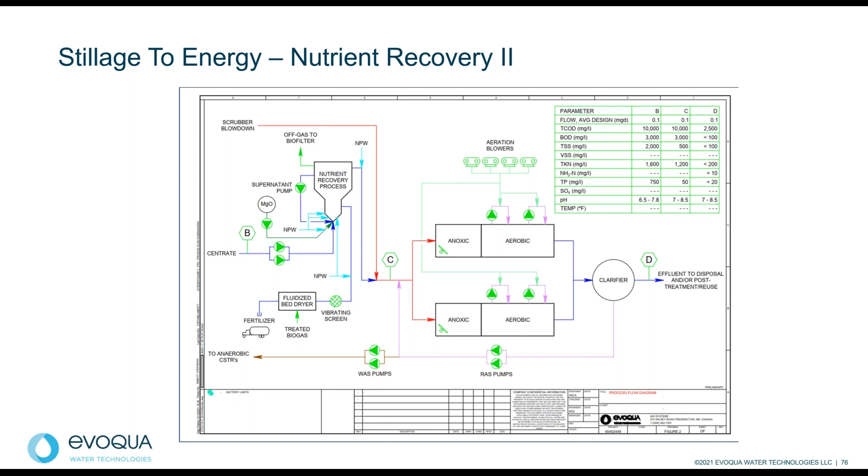You will still have a liquid effluent that needs some post-treatment. In this case, we go through a biological aerobic system that will do BOD, COD polishing, but also quite more advanced nitrogen control, so that you can actually go out to final effluent with relatively low nitrogen, low phosphorus, and low BOD.

So as I said earlier, we've been doing this kind of project for a long time. What we did see in our experience in foreign countries where maybe it's warm, the digested stillage can be stored and land applied, so you're getting the water and nutrient back into the land directly, rather than drying it and selling it as fertilizer. In cases like Thailand, you can do that. You can get the energy out, you can become energy self-sufficient, but there would be no treatment downstream because that water can be used for irrigation.

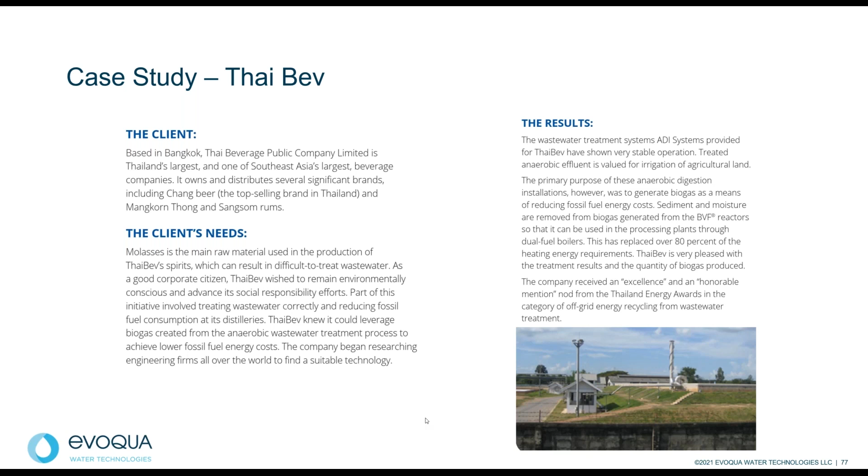But this is a great example of a plant that became self-sufficient. It's a fairly large distillery, 160,000 gallons per day of stillage, which would probably be from about 200,000 pounds of COD per day. Great energy value, and the company can get that energy out of the stillage and not have to use any external fuel sources for running that plant. So again, this is a plant that became self-sufficient in terms of energy as they digested their stillage.

Thanks, Jose. And pardon the pun, folks, but that's a lot to digest between everything Kurt went through and everything Jose has gone through. We didn't set out to solve all the problems today, and as we mentioned, there isn't a golden arrow or a one-size-fits-all solution here. There are actually an increasing amount of options for the modern distiller to consider as they seek to optimize the value of their residuals. So I would suggest in conclusion that the small to medium-sized processors that may be challenged by DDG economics consider anaerobic digestion either instead of or perhaps alongside of a DDG process.

I would say the larger distillers should consider the economics and just do due diligence to make sure that, as I mentioned, they're recovering maximum value. I will remind you that the discharge limits play a large role in both the technology selection and, as a result, the cost of the project, which can make or break economics in some cases. The value of the biogas, which is really what we're trying to target here, varies considerably based on the method of utilization. I would finally suggest that the macro indicators that we're seeing suggest that this isn't the last we'll talk about stillage as a waste to energy feedstock.

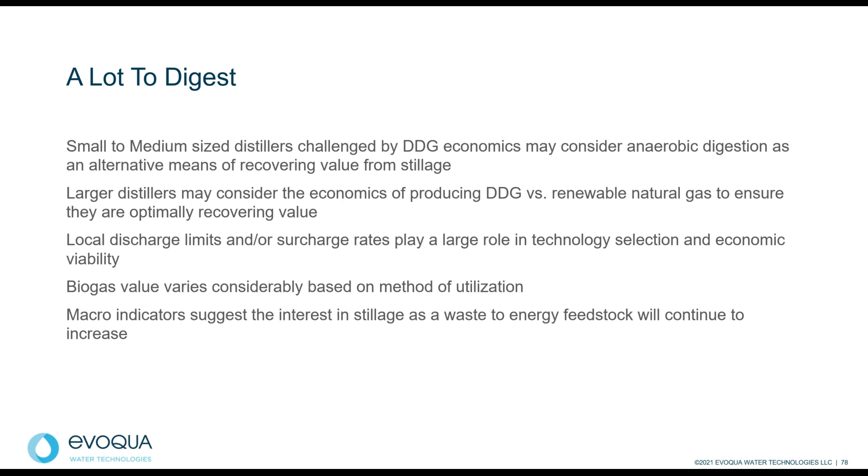Yeah, that's a great question. Thank you for that question. Similar to what you would see with condensed distiller solubles from some of the distilleries and the ethanol plants, typically they are sold as a top dressing for cattle feed, for beef and dairy. Most of the ethanol plants have moved away from selling condensed solubles separately, and just incorporate that into the DDGS. But a few of the smaller ethanol plants still do that, and then some of the distilleries do that as well. So generally, it's the medium to larger scale distilleries. But the pot ale syrup and the condensed distiller solubles, oftentimes we see that sold as a top dressing for silage, for example, for hay, and then for other concentrates as well.